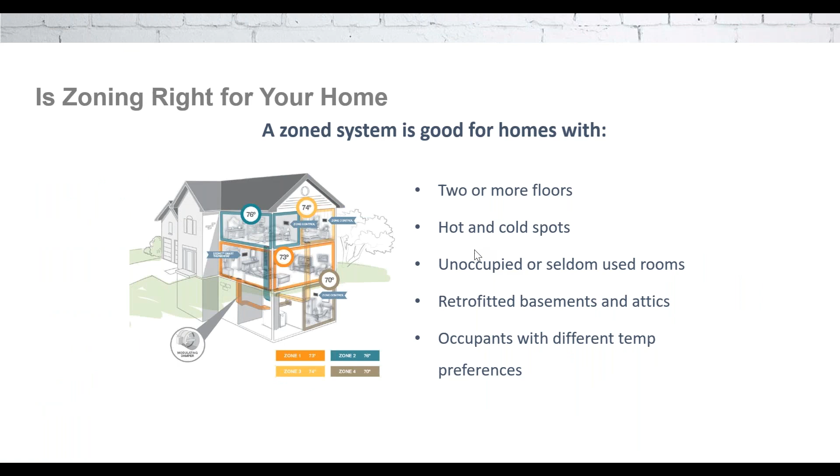Hey, Jay, are you able to advance the screen? Perfect. Good. So perfect, that's right there.

So as AJ mentioned there, the Rheem EcoNet zoning solution, which we just launched last month, is utilizing the new Econet smart thermostat, which was launched earlier this summer. And this is a fully communicating zone system. So a lot of the advantages there when it comes to just setup installation. Really, we're kind of modeling our Econet zoning solution as delivering precision, comfort, energy savings, and flexible control and convenience.

The components, which I'll go into in more detail, are going to be the Econet Smart Thermostat, which is kind of the Zone 1 master control. You'll have Econet zone controls, which are identical hardware, but slightly different software. Zone panel, and then fully modulating power open, power closed dampers. So next slide.

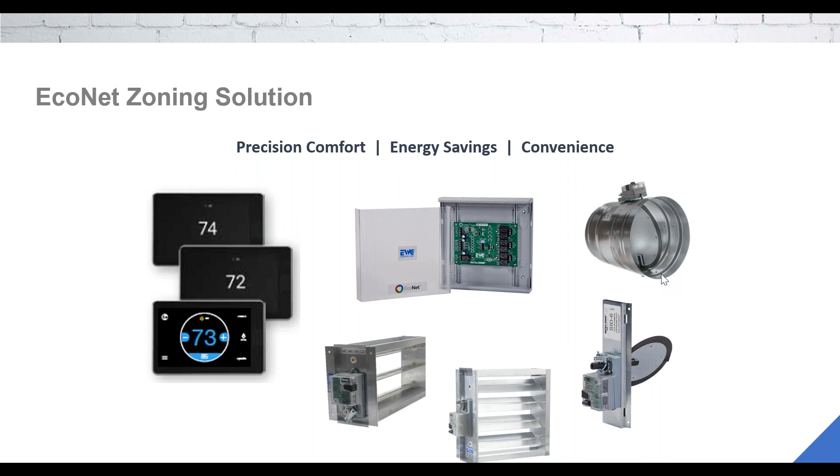Perfect. So we're kind of advertising this or messaging this as ideal comfort when and where you want it, with independent control of up to 6 zones. So as you can see here in the diagram, we've partnered with EWC. They've built a communicating zone panel to our specifications. It only works with our Econet zoning solution. And each panel supports up to 3 zones. The 2 panels can be wired in parallel to support a total of 6 zones. And as was mentioned, we have the 4-wire communication for quick setup.

But some cool features that differentiate the Econet zoning system. We have automatic airflow optimization, which in most applications will eliminate the need for your traditional barometric bypass. It's because the system is fully communicating and knows the airflow that's being delivered. We have an exclusive damper linearization algorithm, which I'll go into in more detail later, and then customizable airflow limits by zone, as well as the ability to average humidity by zone, and then zone-specific alerts and alarms, which really simplify troubleshooting and eliminate multiple trips to different zones and the basement or attic.

So diving more into each one of the components, quick background on the smart thermostat. As I mentioned, it was launched in June of this year. It is Wi-Fi enabled, so we've eliminated the external Wi-Fi module, and then it has a lot of cool new features like integrated weather, compatibility with Amazon Alexa, as well as some more detailed diagnostics and status information.

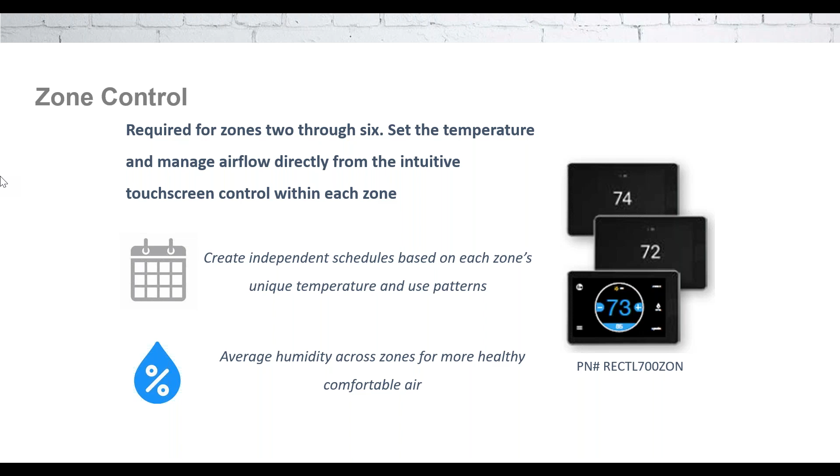The part number is kind of below the image there. It is the RECTL700ZON. So we try to keep it similar nomenclature. Big difference there is that it ends in ZON, but it is the 700 series.

For the zone panel, this was, as I mentioned, developed in partnership with EWC. We've received a lot of great feedback, and it's been a very positive and collaborative relationship with EWC. This zone panel is specific to Rheem. It will only work with our EcoNet zoning solution. And then 1 panel per 3 zones, giving you a total of 6 zones when it's wired in parallel.

We really wanted to make it convenient for our distributor network. So distributors that had a pre-existing relationship with EWC, we wanted them to be able to order the zone panel or dampers directly from EWC, or if it's easier to go through Rheem parts, we will also stock the panels and dampers there. One thing I want to call out is that the smart thermostat and zone controls are only orderable through Rheem parts, so EWC does not carry the stats.

The panel has really nice, clear LEDs that communicate system status, so it'll communicate damper position, open, close, and some basic communication alerts. And then it comes with a 5-year warranty.

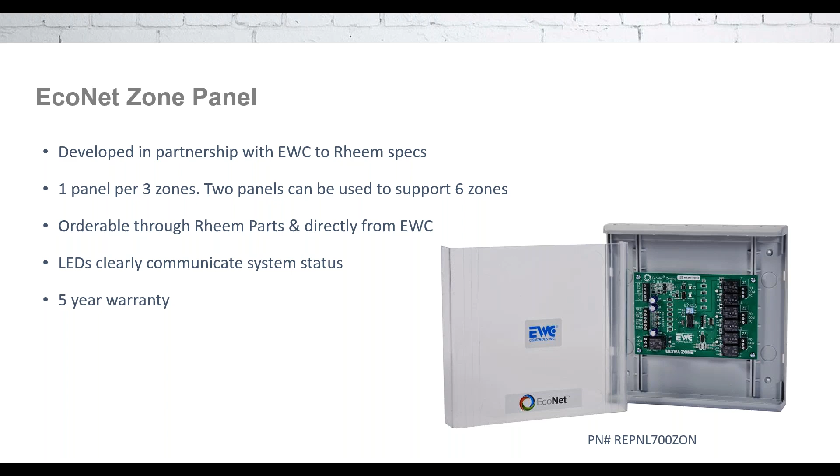So this is kind of an exploded view or a close-up view of the zone panel. In the top left, those are going to be all of your EcoNet communicating terminals. So you have the E1, E2, and then R and C. The terminal that you see there is not actually used, but it is there.

In the top right, you will see we have zone 1/4. We do not have panels that are specific if you're using a second zone, so that's why it's labeled 1 through 4, 2 through 5, and then 3 through 6. And those are your 3-wire damper terminals.

In the middle there is switch bank one, and it's applicable when a second zone panel is used. So in the event that you have a second zone panel, you would need to switch that first switch in that bank to the on position. And you can kind of see right there above it, zone 1 through 3 / zone 4 through 6 is on the right, so you would switch it to on.

The second dip switch there is if you're using an intelligent bypass. And in the event that you did have an application that needed the intelligent bypass, then you would need to switch dip switch number 2 to the on position on the right side.

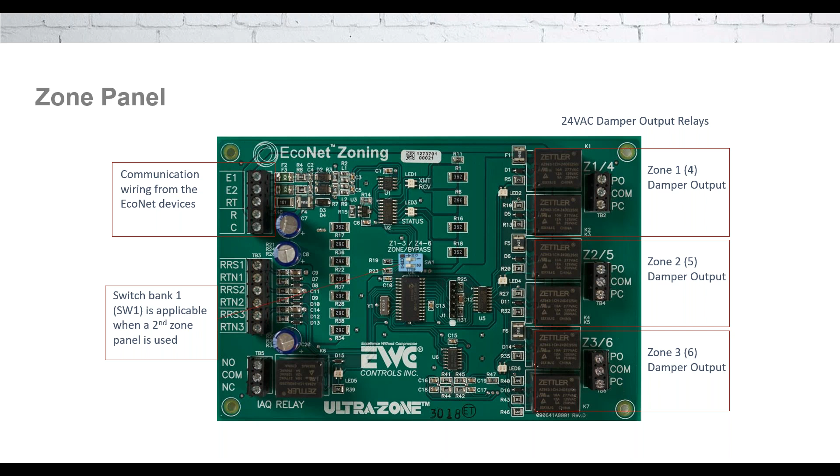Moving on to the dampers, we are supporting the rectangular ND model dampers, the round slip-in dampers, which are the SID, and then just the round dampers, which are the URD model. So these are the Ultrazone EWC modulating dampers, power open, power close. Important thing here is that these modulating dampers have a 35-second drive time from full close to full open.

Questions come up a lot. Can I use another power open, power close damper? Correct answer there is no. You need to use these EWC dampers because a lot of our algorithms for performance and efficiency are built around this 35-second open to close time. Technically, if there was another damper out there that had that exact same drive time, theoretically it would work. But really, EWC dampers are the ones that need to be used in these applications.

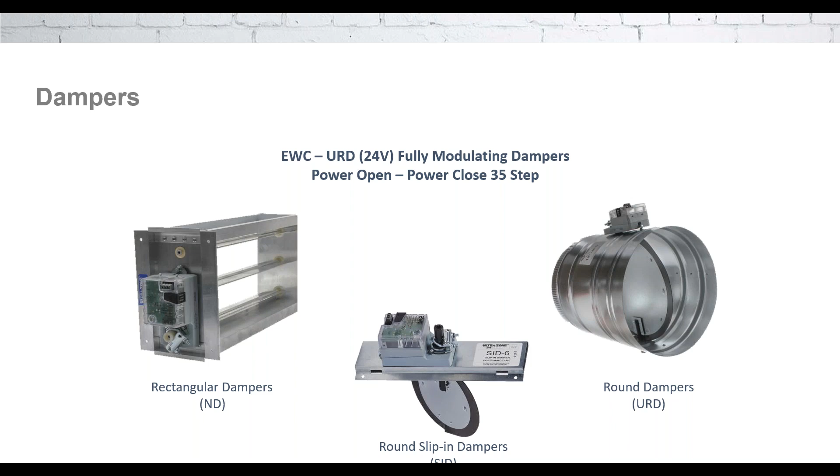So a big thing for us was making convenient and flexible control. So obviously, when talking to the local interface there, you can control zone temperatures from each one of the local controls. We're working on software right now that would allow you to control zone set points and fan speeds all from the master to provide another option. But you will have full control of all zones from the Econet app. So a lot of users, I know, just rely on the app for control of all their comfort. So that is an available option to control all the zones.

And then, as I mentioned previously, Alexa is another option that if you have one of the Alexa-enabled devices, you'd be able to control temperature, comfort, and ask different inquiries about what the temperature is or what mode it's in, et cetera, all from those devices. Another integration that we're working on here in the short term is with Google Home. So that should be out here in the near future to provide a little more flexibility for people that don't have the Alexa devices.

So compatible equipment, I mentioned this is an EcoNet-enabled solution. We really recommend that both applications, the indoor and outdoor units, are EcoNet-enabled. So we will have the 90 mod furnaces, the 96B, the 802. On the outdoor unit side, we now have the 17 and 20 SEER, so AC and heat pump. And then on the air handlers, the only compatible air handler is the RHMV. The RH2T is not compatible with the zoning system. If it's installed that way, you'll get an alert, and the system will simply not run.

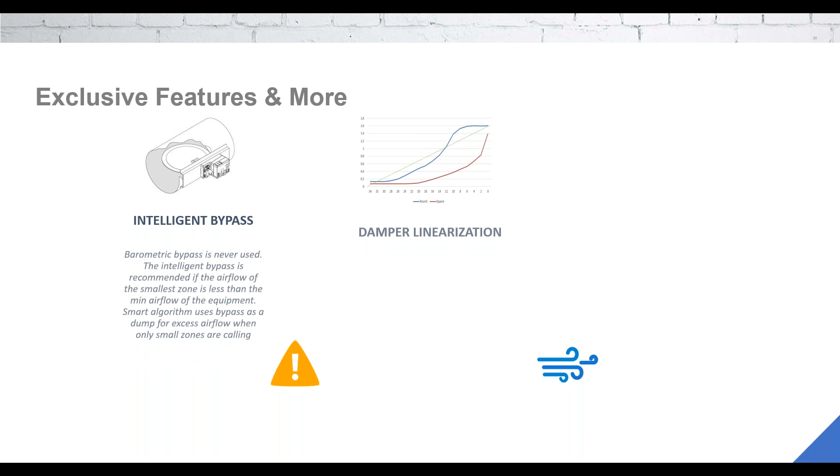With damper linearization, since we have all these different damper shapes and sizes, typically the airflow that is being delivered into the system is not in a linear relationship with each damper position.

And so what this routine does, it's a patent pending routine, but it takes about 5 minutes per zone to run, but it'll close all the dampers and then open each zone independently and kind of run through a series of different airflows with each different damper position. So that's going to help with just noise control and overall constant airflow throughout the zone for more precise temperature control.

The duct measurement, it's not automatic per se at setup. We do recommend that you go into zoning checkout and you run the duct measurement. All it takes is a quick press of the button, and that routine will automatically start. It's going to do the relative size of each zone, including leakage, and it takes about 1 minute per zone. So 6-zone system, it shouldn't take any longer than 6 minutes max.

After that duct measurement has been run the first time, it will again repeat itself every week. That's just really to see if there's been any changes to the duct work, or if registers have been closed, etc. If you don't run that duct measurement at startup, it'll still run by itself after that first week to build the baseline there. Damper linearization is something that is manual. If you don't run the damper linearization, it's not going to run on its own after a week.

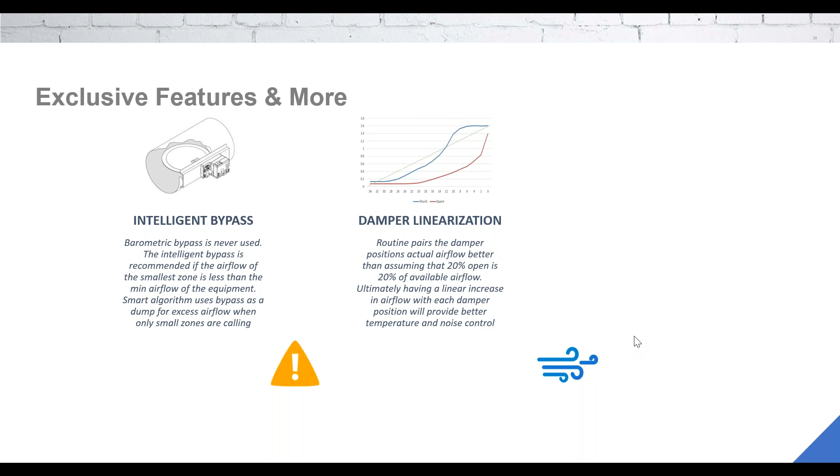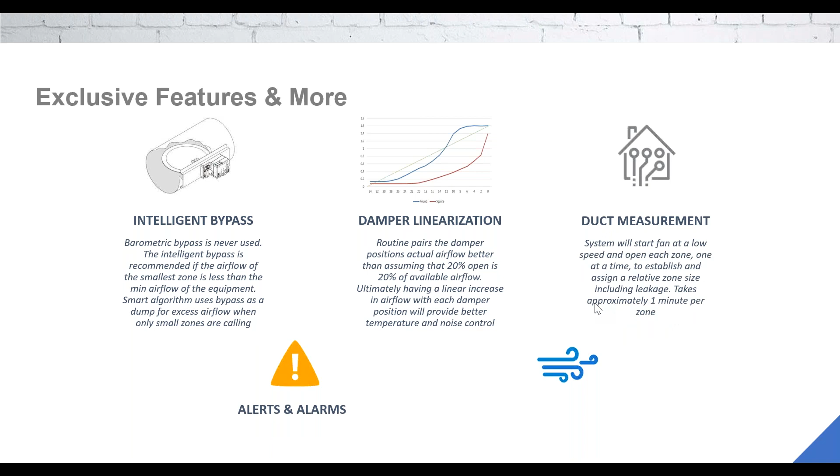We've built in zone-specific alerts and alarms to make troubleshooting easier. Those alerts and alarms will show up on the specific zone control, and they will also be available from that master smart thermostat or zone 1 control.

Another unique feature is the airflow noise limits. So by default, the noise limit for each zone is going to be set to unlimited. But really this is used if you have customers that are complaining about airflow sounding like a jet engine in a particular zone, then you're able to kind of scale that back and choose from a series of 5 different airflow settings with CFM to cap or reduce the amount of air that's allowed to go into that zone to accommodate noise.

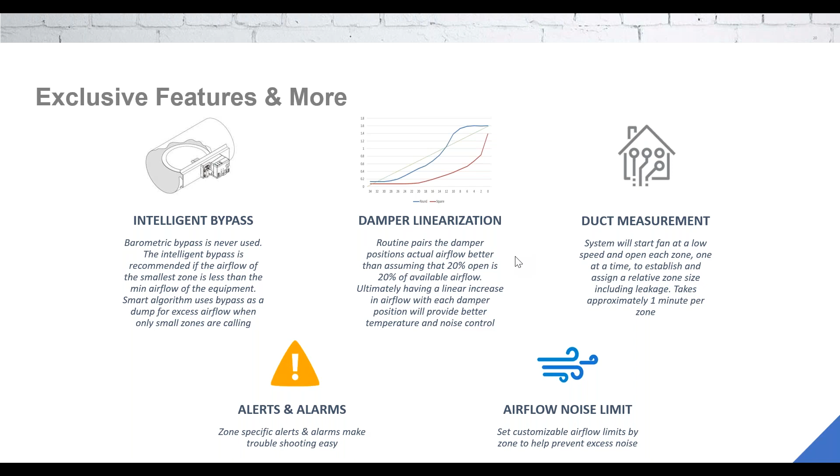So looking at some of the comparisons, I wanted to start with just your traditional non-communicating zone system. Obviously, you have the mechanical bypass versus either a bypassless system in our application or the intelligent bypass option. A lot of the other ones, you have the power open, spring closed dampers versus fully modulating in our case. And then you can just see some of the other features that your traditional Honeywell type non-communicating system doesn't have when it stacks up versus the EcoNet solution there.

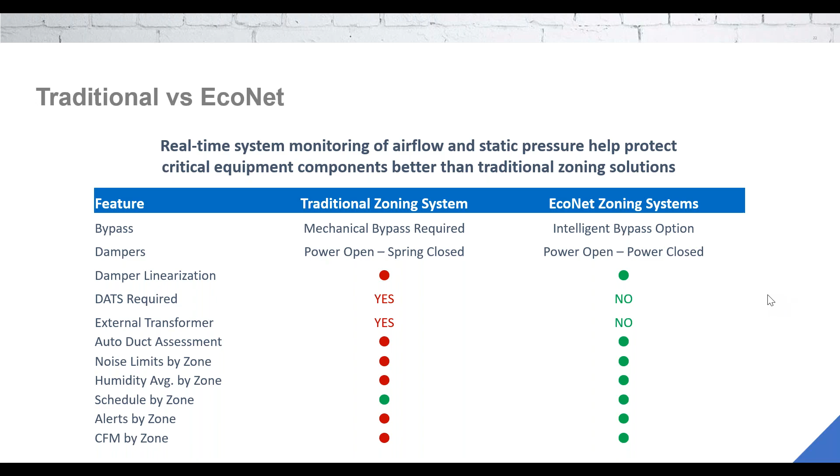Slide 21 was just a quick glance at competitive landscape. We spent a lot of time developing the system. We've worked with a series of contractors as well as some of our executives, and we really felt that we built a compelling application that's extremely competitive with the market, and when installed in the correct application with correct expectations should surpass the competitive zone systems that are out there today.

So selling points, kind of how we're looking at it, the fully modulating dampers, you can install up to 5 per zone. So in a 6-zone system, you could have up to 30 dampers. We have the intelligent bypass option. There's patent pending technology with that intelligent bypass and the damper linearization, airflow noise limits, and then obviously reducing stratification overall.

Installability, just like a non-zone system, when that smart thermostat is connected, it's going to detect all of the communicating equipment and optimize the settings for performance and efficiency. And then from there, everything is configurable from that master control. So no need to run to the different zones or go up in the attic and check on the panel to see damper positions. Everything is viewable right there on the smart thermostat.

There's no discharge air temp sensor required, no external transformer, and as I mentioned, no bypass. It's very easy duct assessment. And then the rectangle and round dampers are really a direct replacement for the Honeywell, so no need to cut new duct work. They'll just slide right in. Because it is a communicating system, you're really going to have improved equipment reliability. And then with the zone-specific alerts and alarms, it should make troubleshooting much easier.

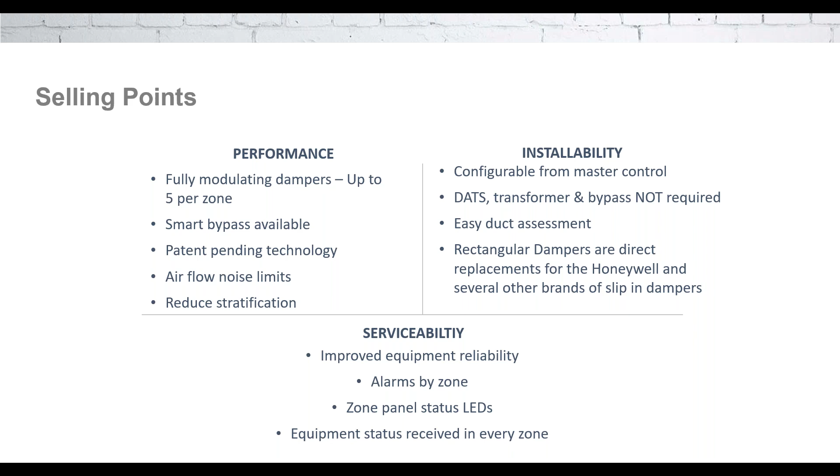The selling versus the competition here, Lennox and their iHarmony system is capped at 4 zones right now. They require the DATs and the bypass. And then a freeze stat is often required for the small zones with minimal airflow. And they also have the high pressure switch required for heat pump applications. They do not have fully modulating dampers and the external transformers required.

Trane requires the DATs and in some applications has that external transformer, but they also have a static pressure probe, which is required for automatic zone sizing, which we do not need there. Carrier was kind of the closest competitive solution out there, but they do not have the intelligent bypass support, no damper linearization, and no humidity averaging by zone.

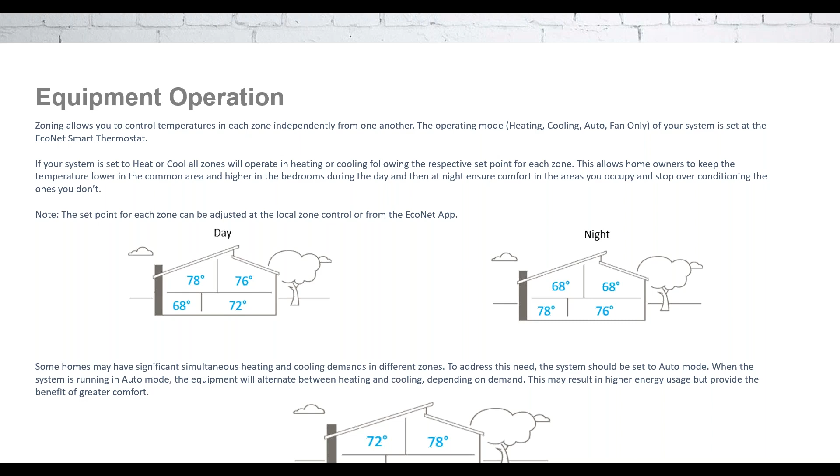I guess the rest of the slide was more just kind of background, some frequently asked questions when it comes to just equipment operation, how we're handling demand, equipment staging, and kind of give some sneak shots of what some of the setting screens look like. I don't want to bore y'all and go over that right now, but I guess at this time I'm happy to answer any questions that you have about the smart thermostat or the zoning solution.

Any questions that we have coming in, or AJ, anything else that you'd like for me to cover? One second here. Let me see if there was any questions.

I know we always get questions on wiring of it. So when you wire, I know it's all more of a daisy chain and not a star configuration. So you got to go from one device to the next. One of the questions we often get is, can they use wire nuts in that application, or is a butt connector better to use? Yeah, wire nuts can definitely be used there. Actually, in our lab here at the distribution center in Louisville, we've used some wire nuts there to help make things easier.

We do have one of the questions. Does the zone master and controls part number start with a U for the Ruud brand? Is there a Ruud brand? So on the smart thermostat, there is a Ruud branded SKU. It's the UETST 700 SYS. And the stat is basically auto-detecting the equipment and will display the appropriate brand logo there in the top left. On the zone controls, we're not displaying brand on the screen. So it's just the one SKU, the RECTL 700 ZON.